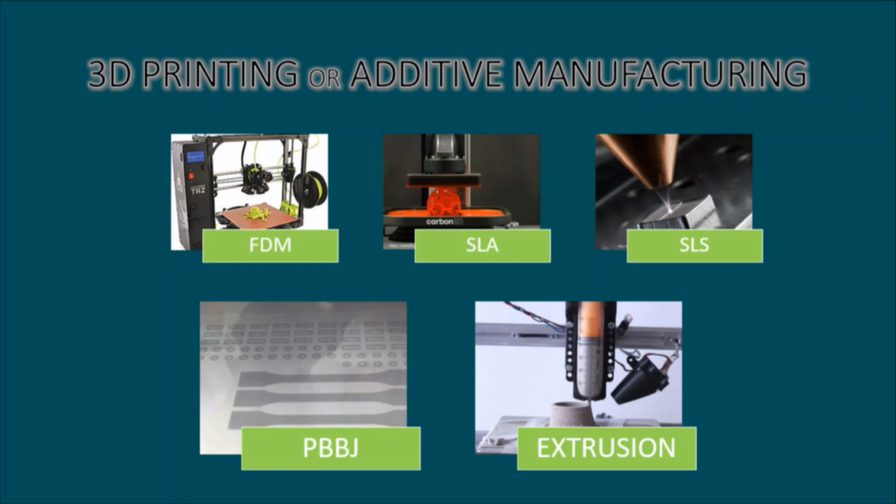Now, most of the 3D printing, and I have to give credit in the audience to Ryan Beamer. He was a colleague of mine, a friend at graduate school. Cassie and I were duct taping everything together to get it to work, and Ryan was essentially 3D printing these beautiful things and had this wonderful looking lab. And so that's where it all began for me.

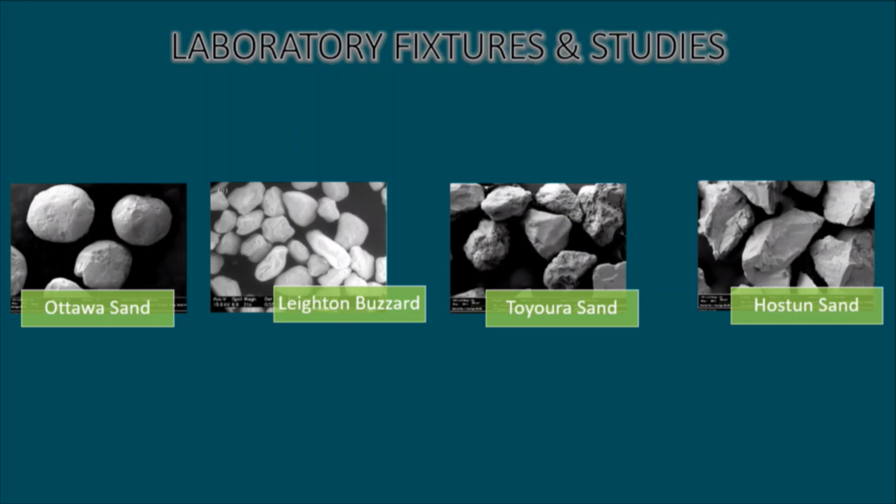That's what got me thinking about how can we use 3D printing, additive manufacturing in our laboratories. Not only for laboratory fixtures, so we've done things like printing the shear plates for direct shear devices. We've printed holders for sensors, things like that. But we've also taken it a step further, and we've looked at it as a way to study fundamental soil behavior. And so one example I'll give you this morning is if we look at sands, we know that as angularity increases, the strength of these sands also increases. And there's a lot of us in the audience and at this conference that are interested in trying to peel back that fundamental relationship.

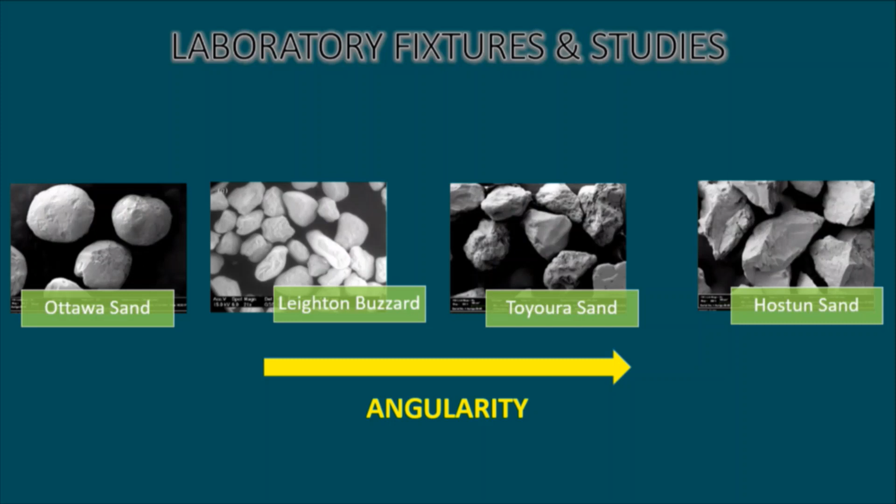When we look at natural sands, if I were to grab a bunch of these and go test them in my lab, one of the difficulties I have is that natural sands vary in mineralogy, surface properties, shape, obviously, and then also gradation. And so it really is a challenge to single out the contribution of that strength just from shape alone. And so one of the ways we approach that in my group is to create what I call analog soils. And these are essentially 3D printed replicas of these natural soils. We can do anything from a sphere like you see here on the top. Oh, wrong way. Right there, those are 3D printed spheres out of a gypsum kind of composite material.

And then we have the exact same material and process we've used to 3D print an Ottawa sand that has been scaled up. So same gradation, same material, same surface properties, and we're able to actually single out the contribution from shape alone. And we set it up in some sort of large-scale triaxial or direct shear, direct simple shear test, and you can see we derive these stress-strain relationships, volumetric behaviors, and we can really start to examine those.

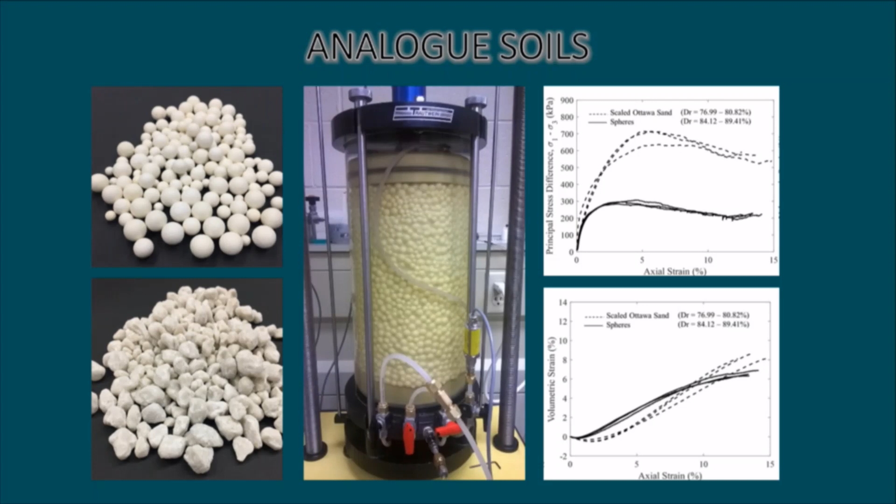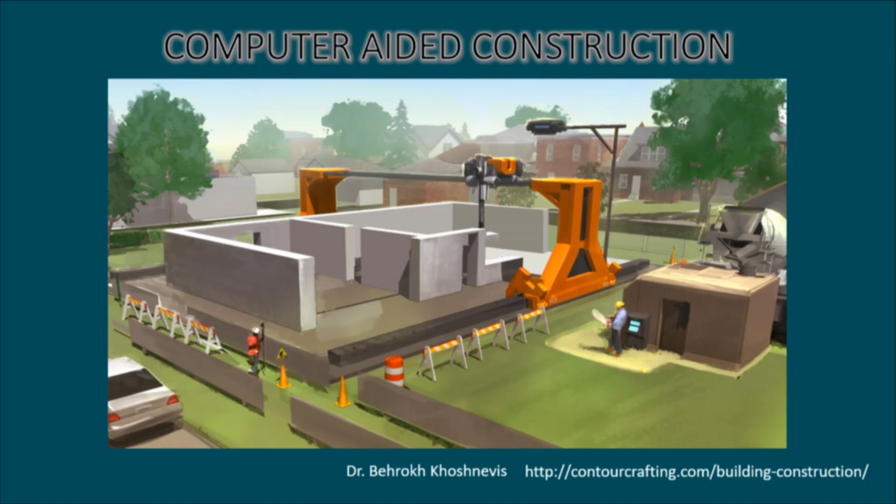Now that's great for us. On a larger scale, a lot of the work that has been conducted has looked at applying these technologies to construction. And so we see these in larger formats, different types of systems. Here you see an example of an extrusion device.

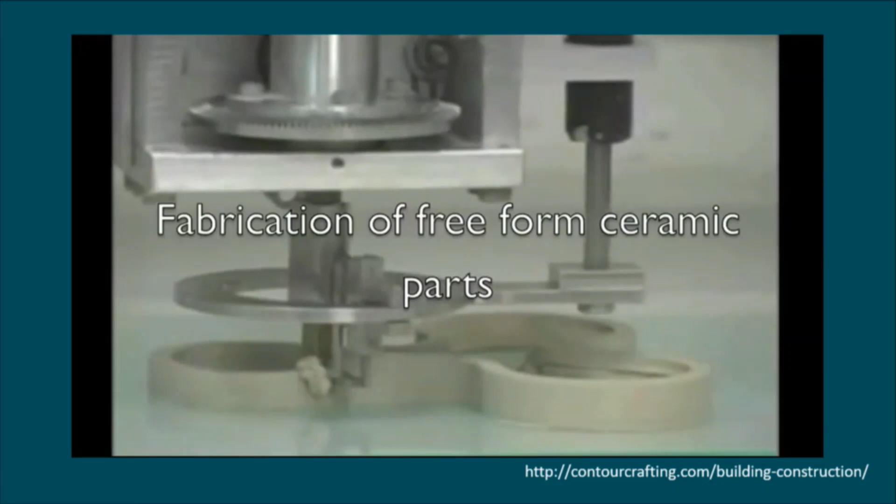I've got a video that hopefully will give you some indication as to how this is actually working at that scale. I have to give credit to the group at the University of Southern California, but also this startup company that was created called Contour Crafting. I'm stealing their video because it's better than any of mine.

But basically, they are able to create 3D objects. This is an example where they're using kaolin clay, so this would be similar to kind of a pottery clay. We could make structural elements, things like that. They're showing it on kind of a smaller scale here, but then in a little bit, they'll show that this can be expanded to larger scales.

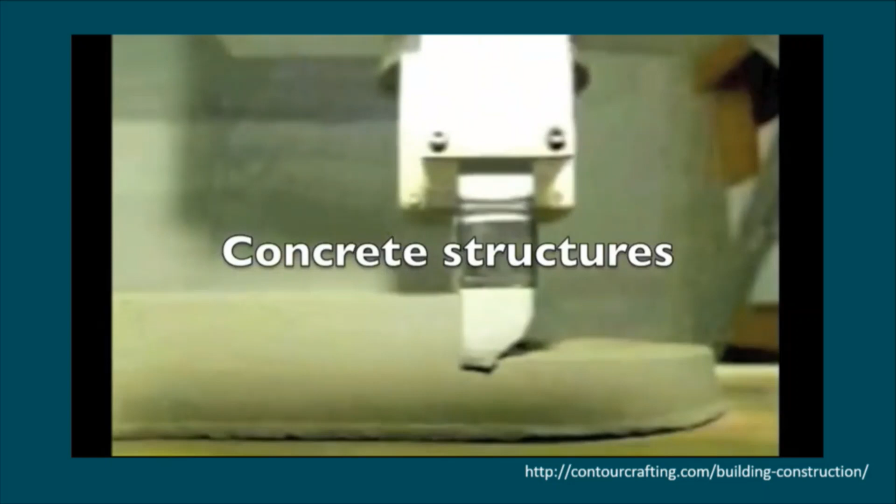And so the same company has created a way to do this with concrete. And this is a lot of what we're seeing in the structural world these days. They're looking at concrete buildings. The Army Corps of Engineers actually has printed concrete army barracks. And you can do anything from a wall section all the way to large buildings.

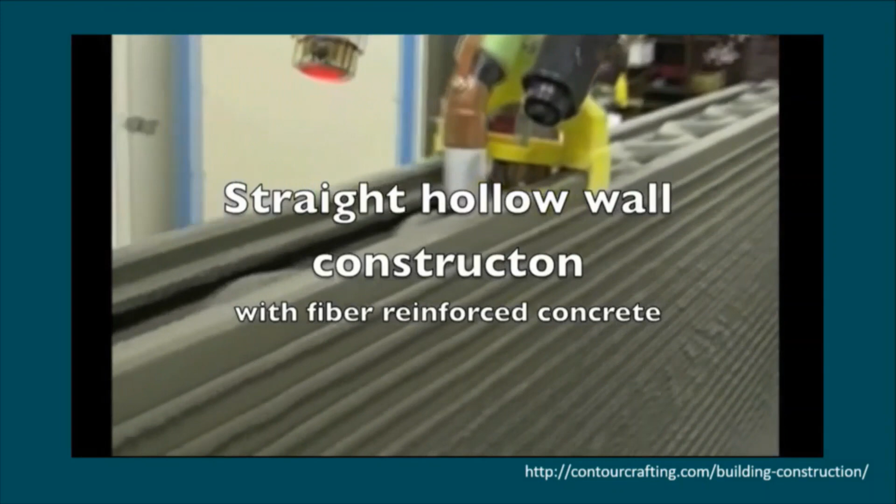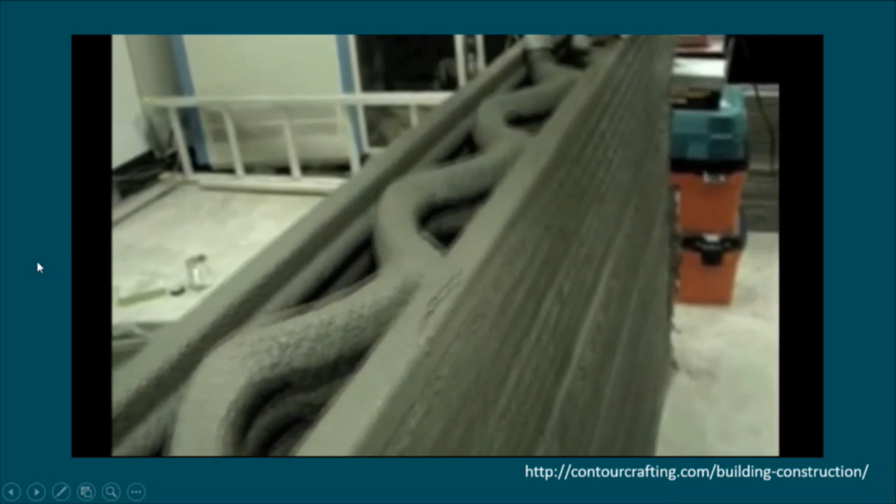And so I would encourage you to go out and look on the internet. There's all kinds of institutions now that have these 3D printers, and they're doing this at really large scales. And a lot of the focus has been on trying to mass produce structures. Now, when I think about the advantages of 3D printing, one of the things that I'm interested in is looking a little bit beyond that. So not to discount any of that, because I think it's amazing what they're doing.

But there are some advantages when I look at a printer like this one out of Catalonia, in Barcelona, basically, and it prints soil as well. So it's also an extrusion device, and they're wanting to print houses. And so I think in the future, this is pretty neat. Basically, in locations where we don't have aggregate, we don't have cement, or it's difficult to bring other materials in, why not use the soil that's on site? And that's been our kind of push in my group, and obviously in some other groups as well.

Now, the interesting thing for us as we take this a little bit further, and maybe this is because I kind of exist on the research side, this is really where I want you to take off that engineering or practical hat for a little bit and dream with me. In my opinion, where this is going to be really impactful is thinking about shapes that we can't create otherwise. When you think about construction and the infrastructure that we create, in the majority of the cases, we're trying to be efficient in terms of being able to produce it and make the construction process as easy as possible.

Most of that is due to the fact that there are low margins. So when we're looking at this from a practicality side for construction companies, it's going to be hard to convince them to implement some of these things unless it can't be constructed otherwise, or we can get these margins fixed. And so I think the real application here is if we think about shapes that we couldn't otherwise normally construct now, this is where 3D printing is going to be important for us.

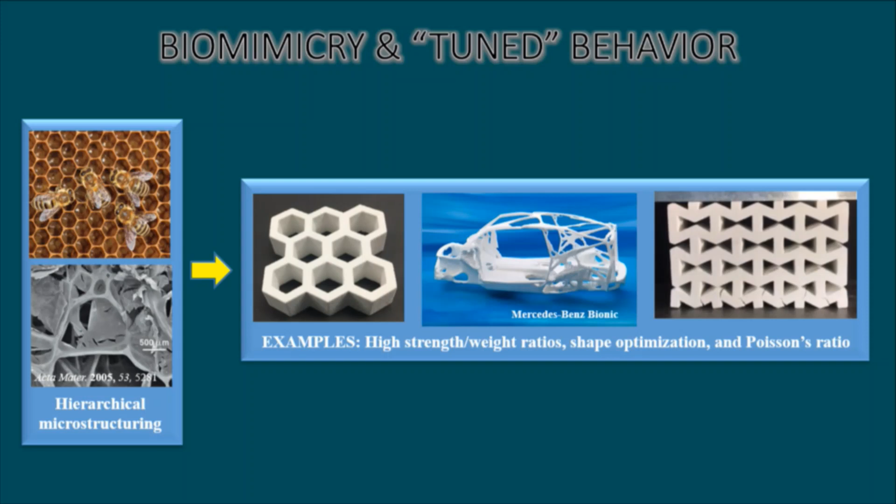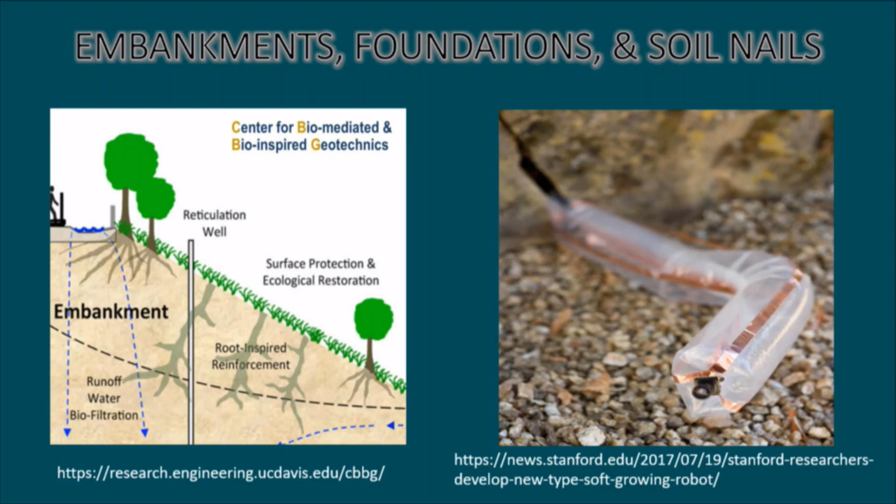Now, in the past, if we think about the way that we construct foundations, piles, or anchor systems or soil nails, it makes it difficult to imagine how we could construct these otherwise. And so recently at Stanford, a group has come up with what they're calling vine bots, and they're essentially soft robots that allow themselves to grow. They can get into tight crevices, as you can see here, and they can actually expand. And so imagine putting a print head or an extrusion nozzle at the front of this type of vine bot. Now you start to picture, if we decide that tree roots maybe are the future and that's what our system should look like, now we're starting to get ways of actually constructing that.

These are what I like to call tuned or macro fabrics. I don't know that that's the best term, but that's what we're going with so far. Again, the honeycomb pattern is one that's pretty simple for us to use as an example, so I've shown that here. We've looked at it both empty and filled, and what we find is that there's really high strength-to-weight ratios compared to just a normal sort of layering or compaction technique that we might use currently.

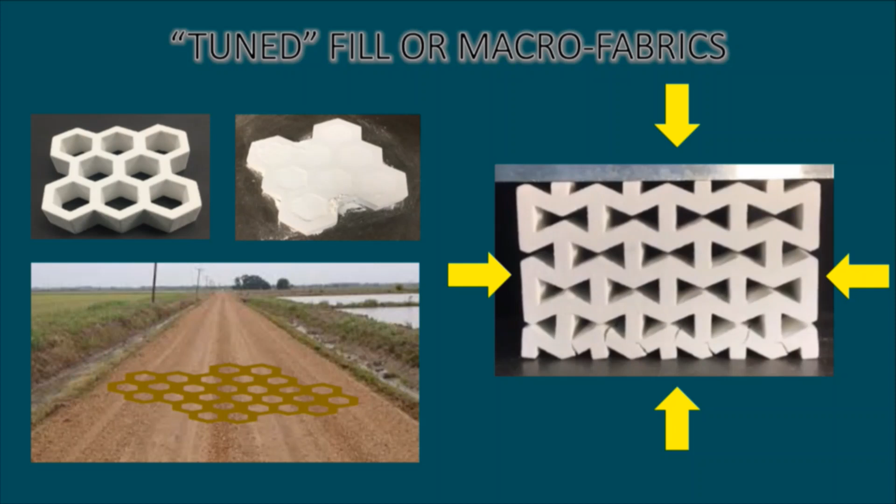The figure on the right is an example of a negative Poisson's material. The pattern itself is actually what's creating this negative Poisson's ratio. So something a little bit different than we're normally thinking about with civil engineering materials. If I load this in compression, the interesting thing is the walls actually contract or squeeze in. So that's different than our normal materials, and there's quite a few applications that we're envisioning where this could be very useful when we think about fills. So again, the only way to construct that would be this kind of 3D printing application.

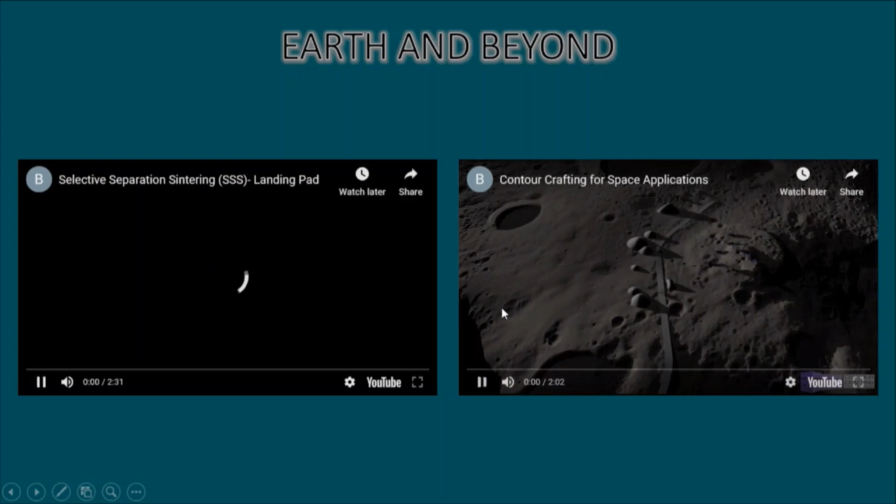Now, I've just added this for fun. These are two videos, again, back from this contour crafting. My friends thought I was crazy when I started talking about doing this on the moon. Stacy's shaking her head. But there really is a lot of talk in NASA right now, a lot of talk in the European space agencies, and they're basically looking at ways of either creating landing pads on the moon or Mars, or actually creating habitats.

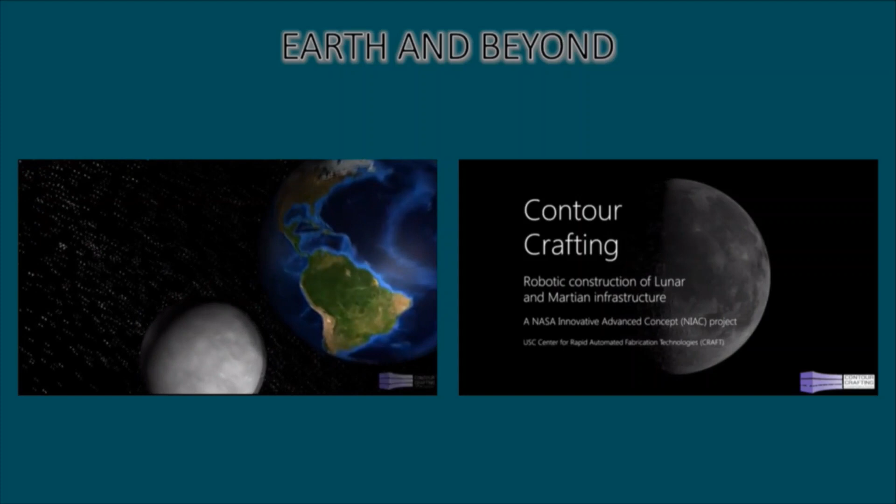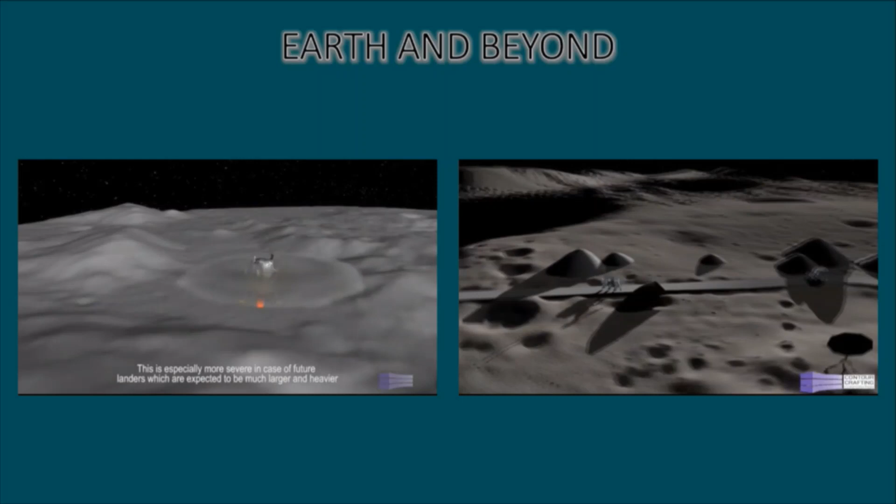And so I want to just leave you with this. Allow yourself to dream. Allow yourself to think about, if we didn't have to have rectangular cross-sections or circular cross-sections, is there a shape that makes more sense? Is there a shape that performs better? Is there a way to do this and not let yourself get limited by the current construction practices, but let yourself think about how to do this on Earth, as well as beyond.

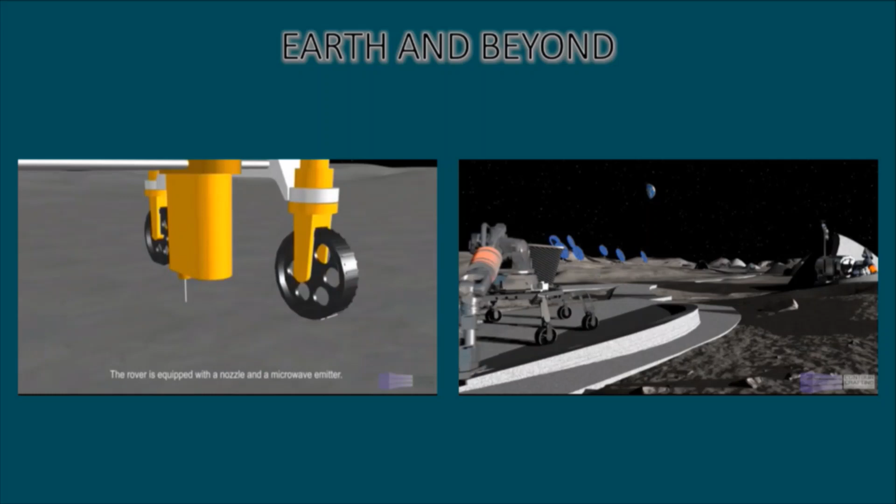And you can see here they've got an extrusion technique as well as more of a powder bed process. And this is one of the only powder bed processes, I should also add, that works in a zero gravity environment, which is pretty cool. So a different type of challenges there as we look beyond Earth.